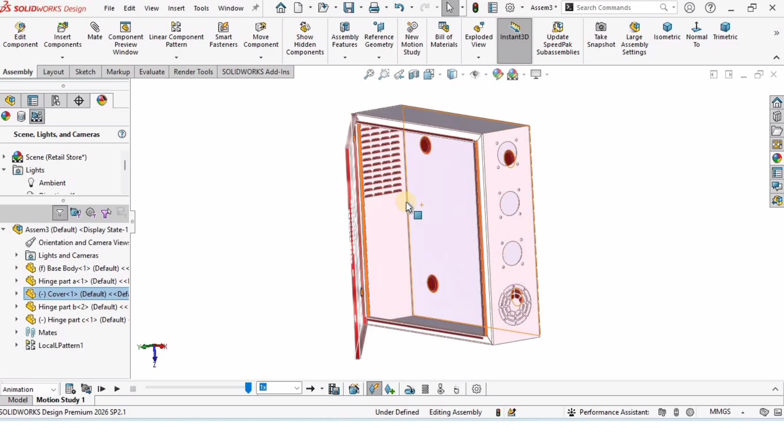Hey everyone, and welcome to this SOLIDWORKS Assembly tutorial in which we will learn how to assemble this sheet metal enclosure in SOLIDWORKS. So let's begin.

You need to open a new assembly file and this window will appear. Just close it. Then select this insert component button and go into the directory where we have saved and modeled all these parts. Select this main body part here and place it over here.

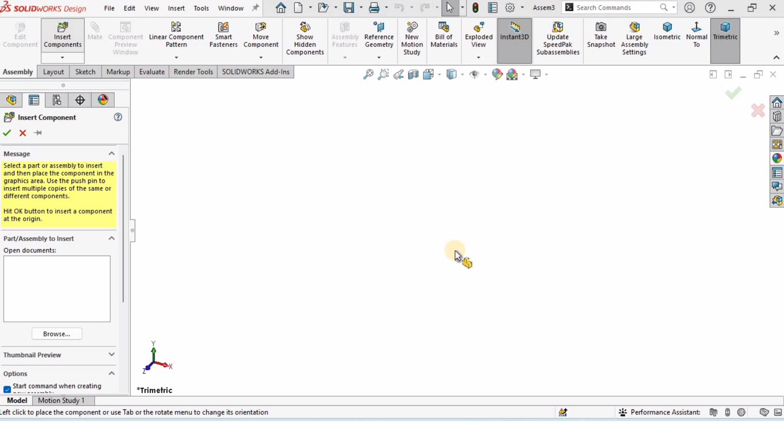Now this is the part which we have modeled in our previous tutorial. Now you need to select insert component again and select the hinge part A, which we have already modeled in our previous tutorial as well.

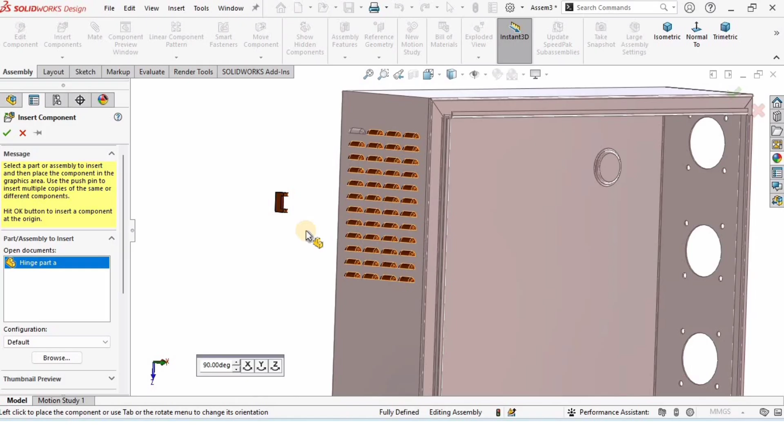You can rotate it by using these axes and place it over here, or you can otherwise use this rotate component button to rotate this part. It's up to you. You can use both of these options.

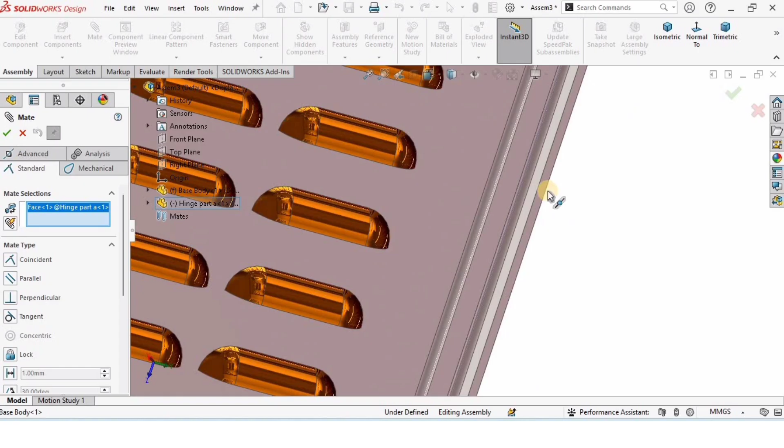Then I will select this face, then select the mate button, and as you can see this previously face already highlighted. Then for the second mating part I will select this inner edge of the main body of the sheet metal enclosure and then check this box.

Then I will select this face and this face of the body and then check this box.

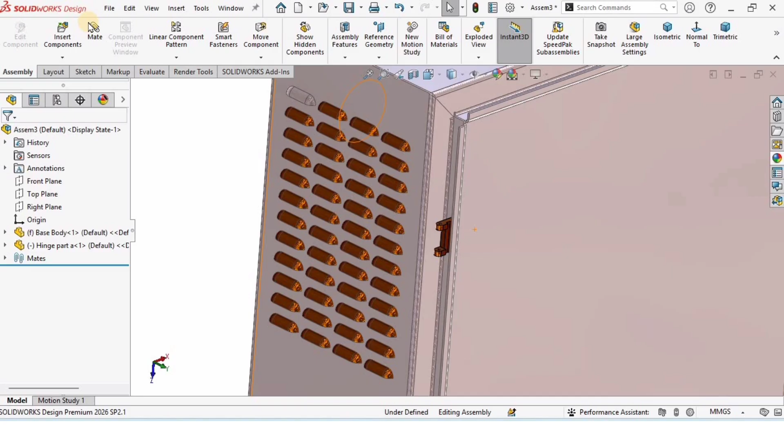Then there is one more mate and this is going to be the distance mate. So I will select the mate again, and this time I will select this top surface of the sheet metal enclosure and this top surface of the hinge part A. Then I will select this distance so that this can be the distance mate.

Here you need to specify the distance and then check this box. Okay.

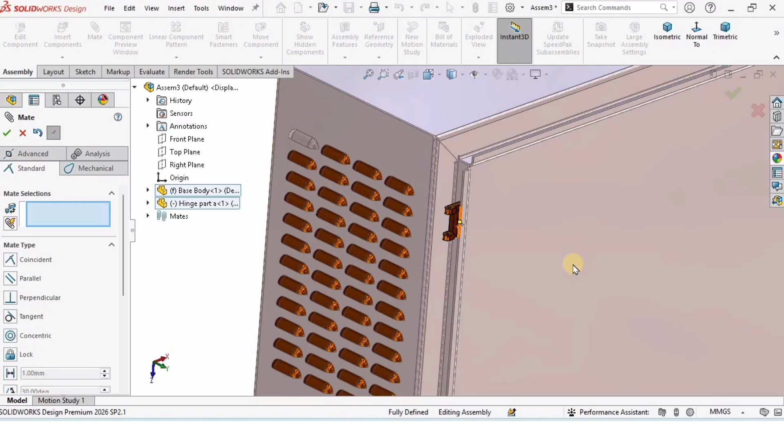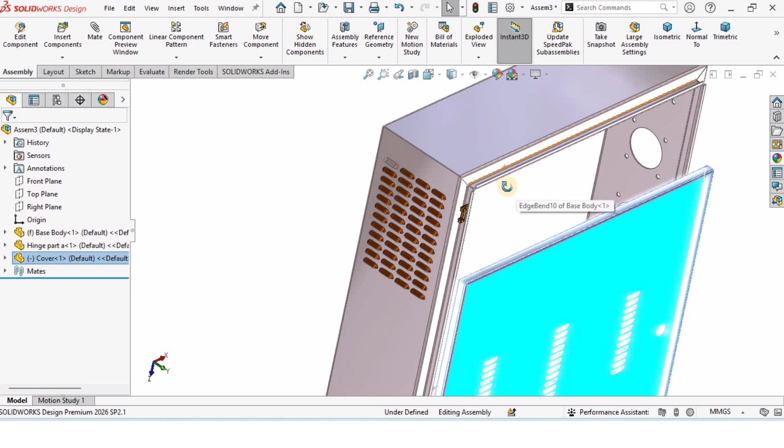Now I will select the insert component again and I will insert the cover which we have modeled in our previous tutorial and then place it over here. If you want to rotate it, you can rotate it using the rotate component button which I have explained earlier. You can drag and move it just like that.

Then I will right click on this and click on fix so that it cannot move. Then I will select the insert component button and select the hinge part B and place it over here.

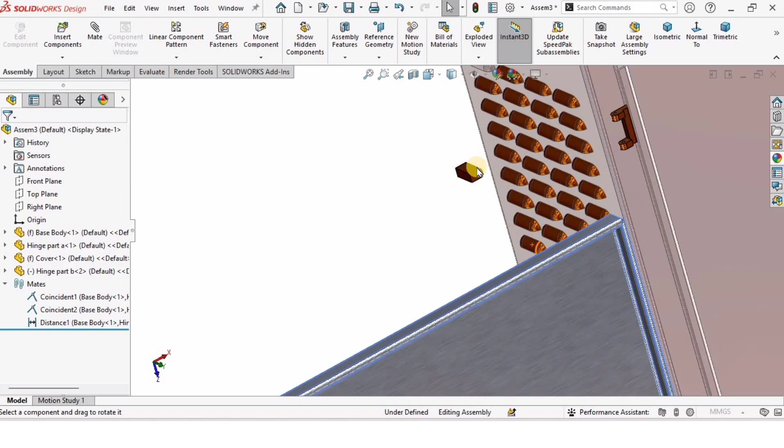Then I will use the rotate component button again to rotate the hinge part B as well, and then I will drag and place it in front of the front cover.

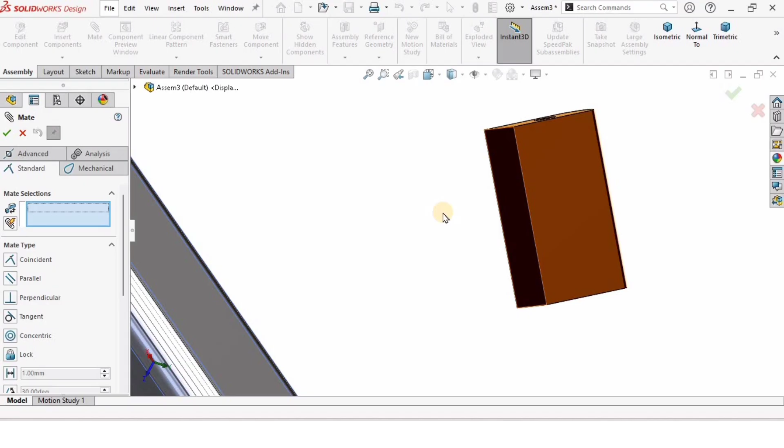Okay, now I will select this flat face of this hinge, this vertical flat face, and select this mate and this surface for mate and then check this box.

Then I will select this inner face of the cover and this side face of the hinge part B, and then this is going to be the coincident mate.

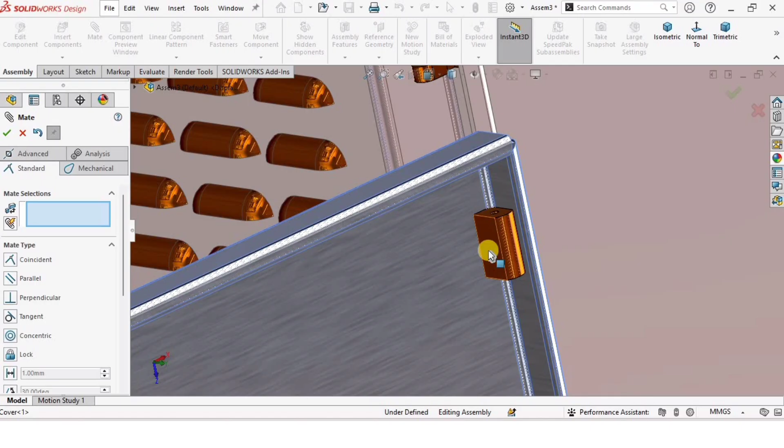Then I will select the top face of the hinge and top face of the cover and select the distance mate, which you can use from here as well, and here specify the distance and then check this box.

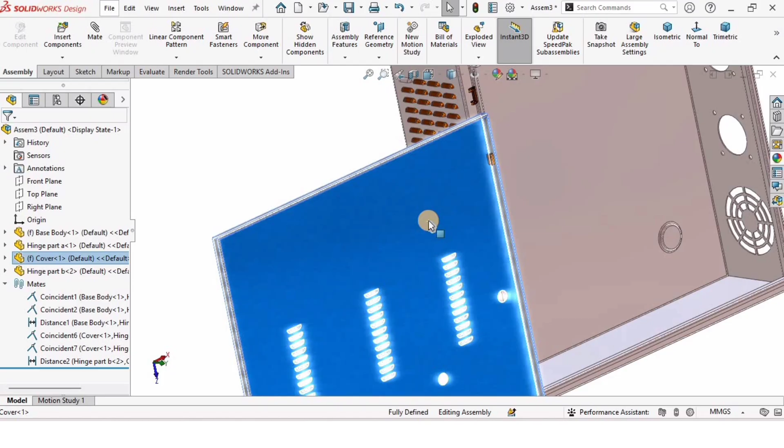Okay, now right click on this cover and click on float because we want it to move now. The only part fixed right now is the main body, which is by default fixed.

Now for the mate selection I will select this circular face of the hinge part A and circular inner face of the hinge part B. Check the box.

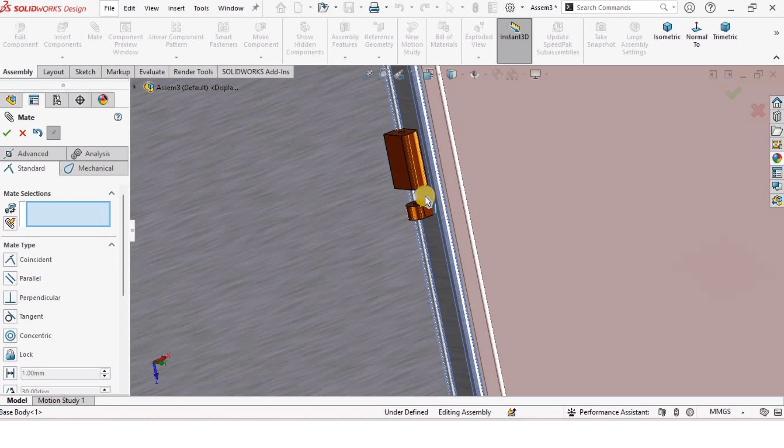Now I will move this cover downward and adjust so that the hinge part B can get inside the hinge part A. So I will select these two faces of the hinges and check the box.

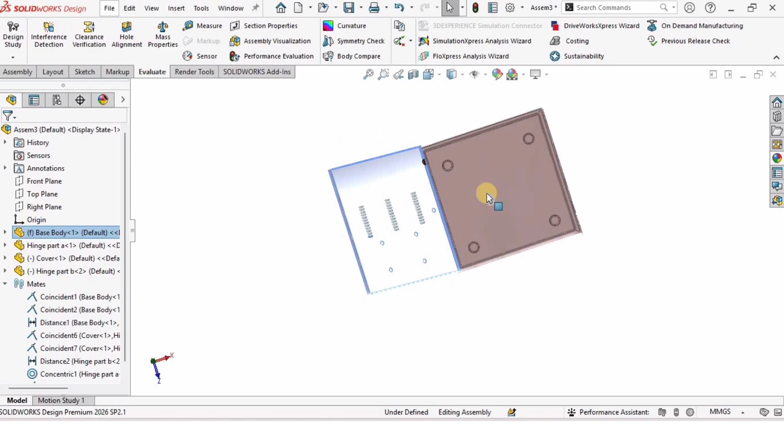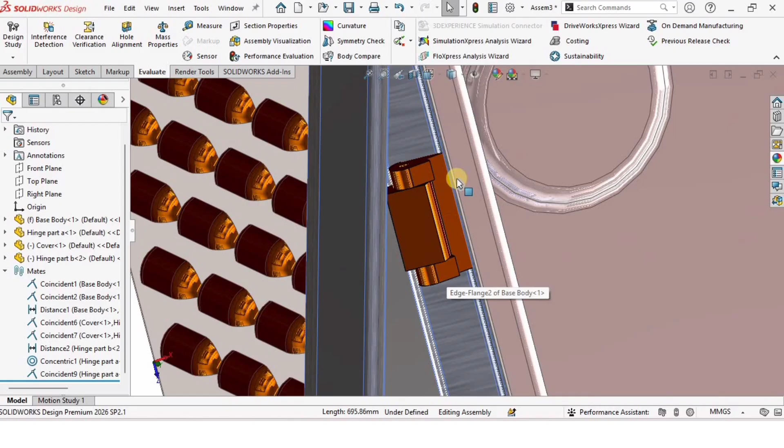Now we need to adjust the mate, basically the distance mate. I will right click on this distance mate in the main selections and click edit feature. Then I will set it to 70 and check this box. Now we have got this adjusted, but there is an indentation here, as you can see, which we will fix later.

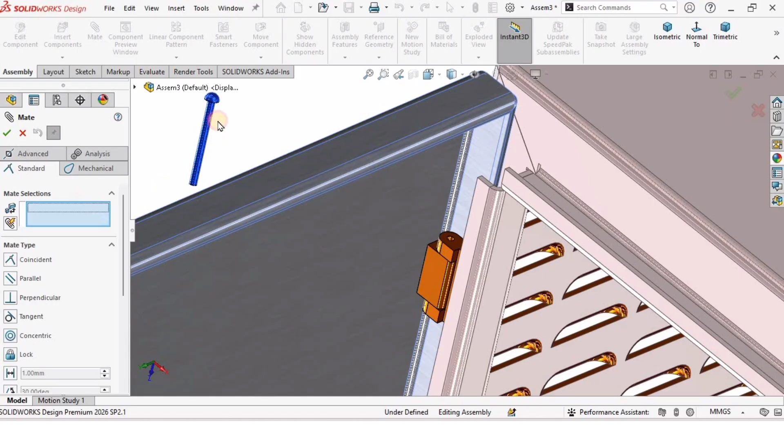Now let's insert another component, and that is going to be the hinge pin. You can rotate it using this axis, or use the rotate component button to rotate it in any direction you want. Then I will select the mate, and for mate selection I will select this circular face of the hinge pin and this hinge, then check this box.

Then I will select this surface for mate and this surface of the pin, and this is going to be the coincident mate.

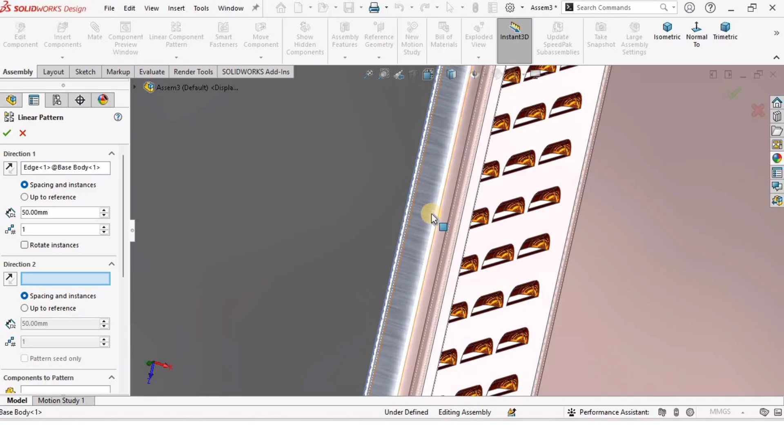Then I will select this linear component pattern because I want these hinges in two sets. For direction I will specify this direction in the first window, and in the component to pattern window I will select all three parts of the hinge, then increase this number from 1 to 2, and adjust the gap.

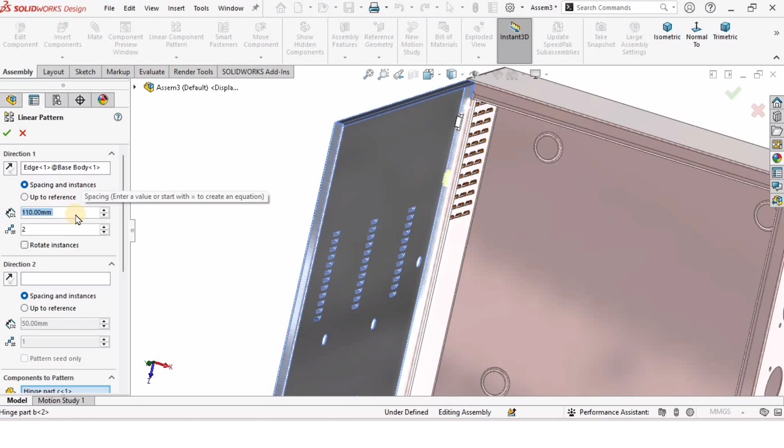Let me show you, you can adjust the gap and specify the value as you can see here. Let me reduce it a little bit and check this box. So this is a linear pattern because we want hinges at two locations.

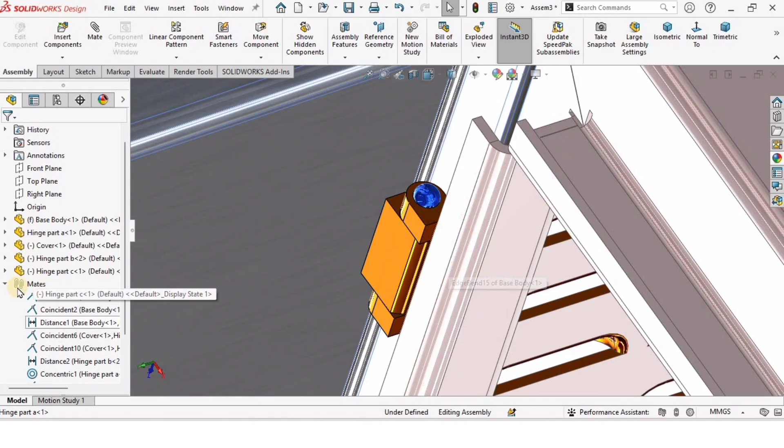Now let's fix this issue of indentation of the hinge and the front door. For that we have mates here, and before the distance mate, here we have this mate, as you can see these highlighted surfaces for the hinge part A. Right click on this mate and select edit feature.

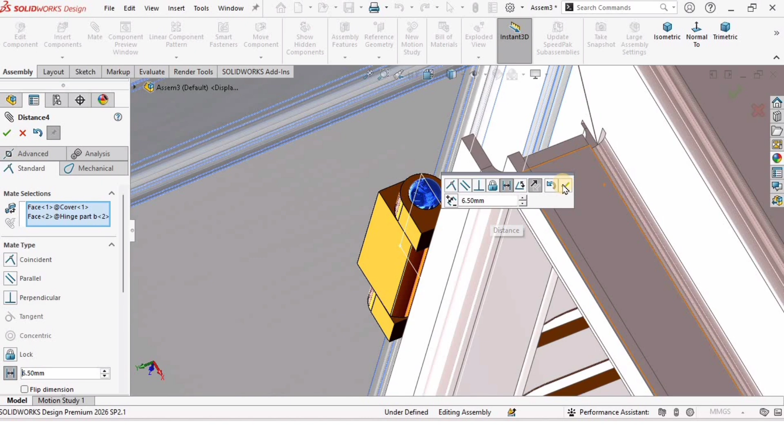Instead of coincident mate, I will make it a distance mate. As you can see here, 6.5 is the distance. Check this box, now let's see if it is right or not.

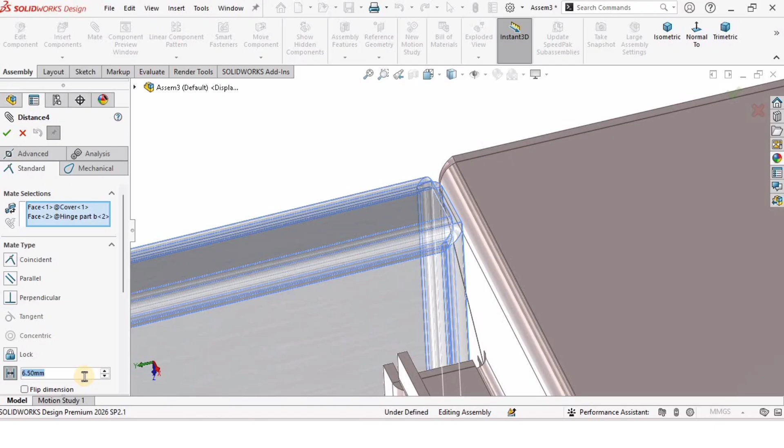I think it is being indented with the main body, as you can see. Now there is indentation of the front cover and main body. So right click on this distance mate and click edit, because now this has become the distance mate from 6.5 to 5 mm.

I think that would be good, and as you can see there is a gap, so it would work. If you want to adjust further you can, and the hinge can now be mounted with the top cover using the bolts from other orientation.

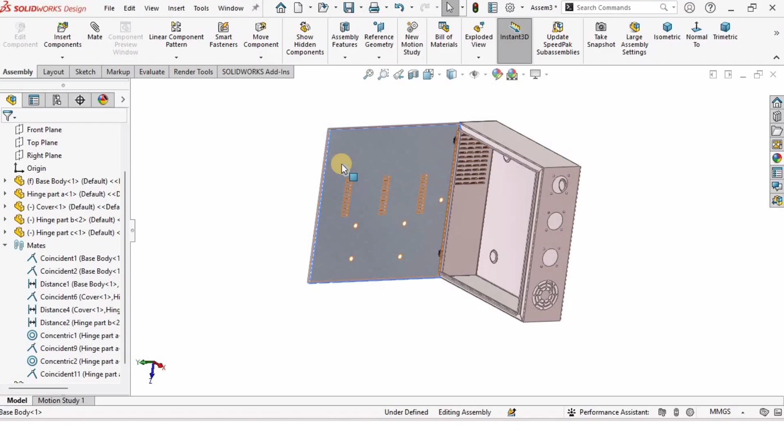As you can see, if I rotate it, it will go inside of it. So we have to adjust the angle.

For that I will select the mate again, and we have the advanced mates. If I select the advanced mate, we have to select these two surfaces for the mate selection, and then select this angle mate.

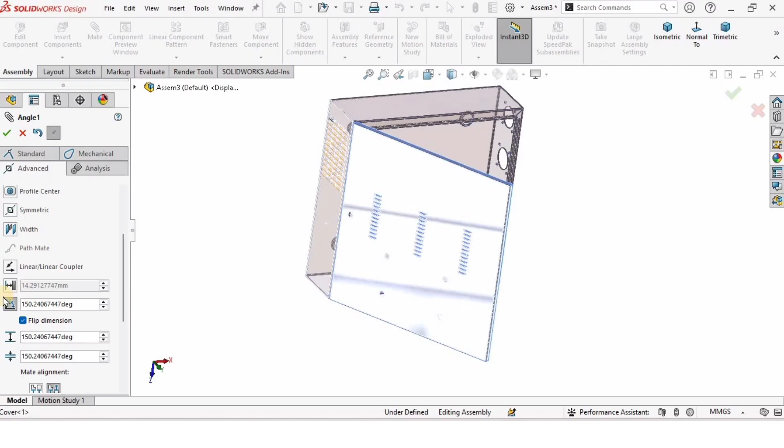Here we have maximum and minimum value. So for maximum value I will specify 180, for minimum value I will specify 90, and then check this box.

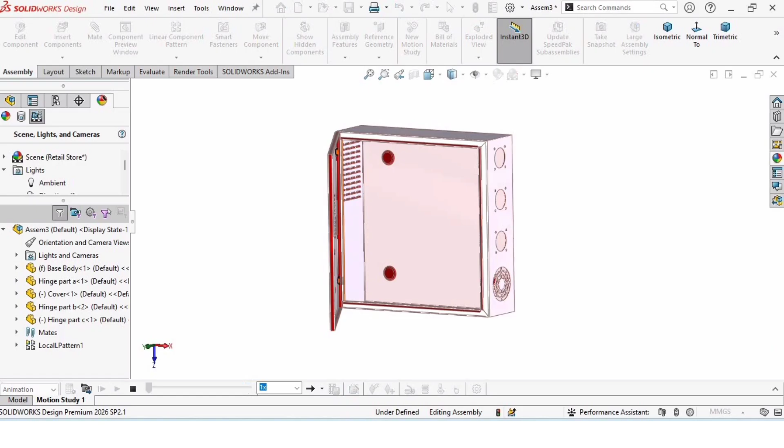Now, as you can see, this is not going beyond the main body. So this is the complete body guys, and this is the complete assembled body.